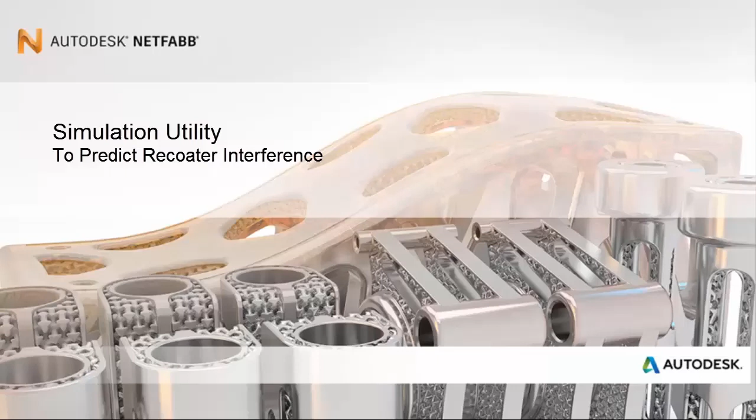Greetings. In this tutorial, we want to explain how Netfabb Simulation determines whether the deformation of part geometry during a build is likely to interfere with the recoater blade. Parts displacing upward through the powder and being struck by the blade is a common cause of part failure during actual builds. After discussing this issue, we will run through an example of a simulation that will trigger a warning

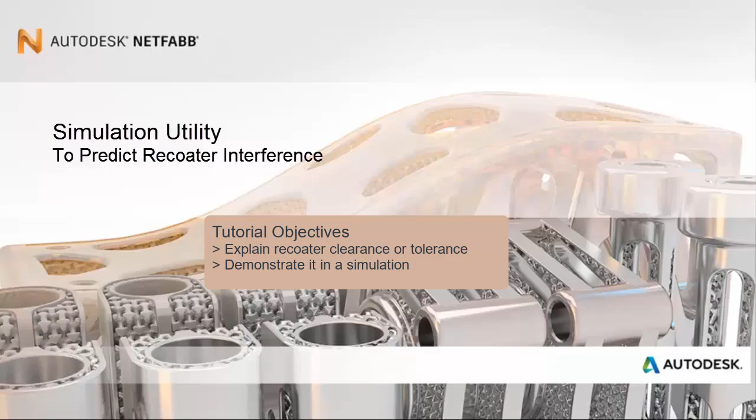of recoater interference. Netfabb Simulation works with a value of recoater clearance or tolerance, which is expressed as a percentage. Let's see how this works. In these diagrams, the gray block represents the solidified material of the part, and the blue area on top is the next powder layer. In the ideal case, with 100% tolerance, none of the previously deposited material has deflected upward into the powder layer. In the second example, an 85% tolerance means that the build has deflected up into 15% of the powder layer. This amount of deflection is normally acceptable.

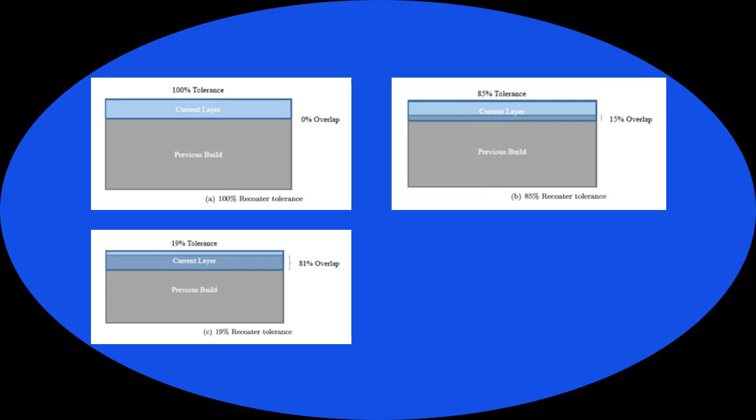The default value for recoater tolerance in Netfabb Simulation is 80%, and if the actual tolerance drops below this level, warnings are reported in the log files indicating that the part is getting too close to striking the recoater blade. That's what we see in this third diagram, where the build has deflected upward into 81% of the powder layer, leaving a tolerance or clearance of only 19%.

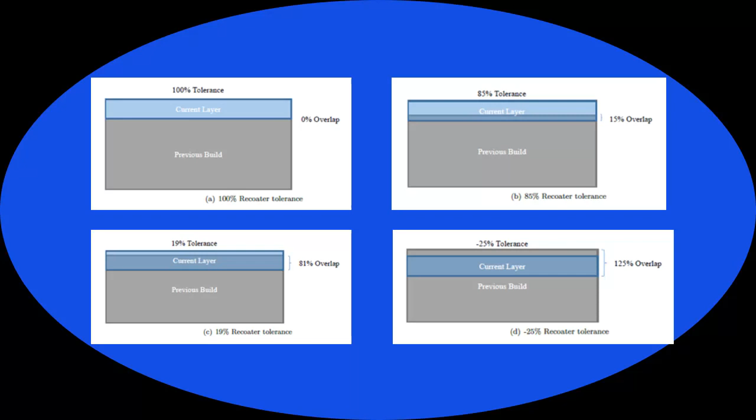Finally, an extreme case is shown in the fourth diagram, where the part has deflected up through the entire powder layer and 25% higher, producing a negative tolerance of minus 25%. The part in this case would definitely be hit by the recoater blade and possibly damage it.

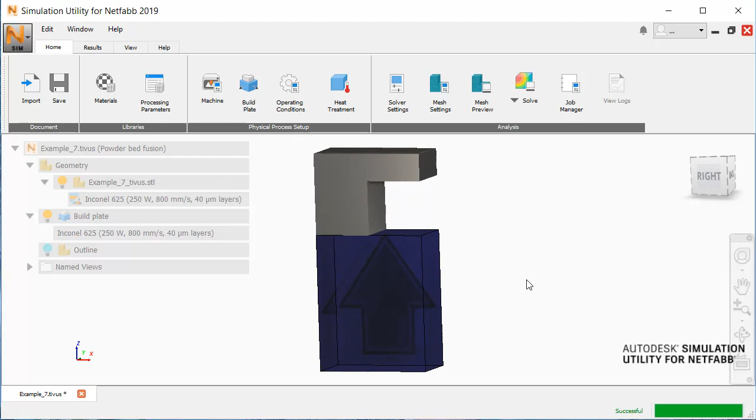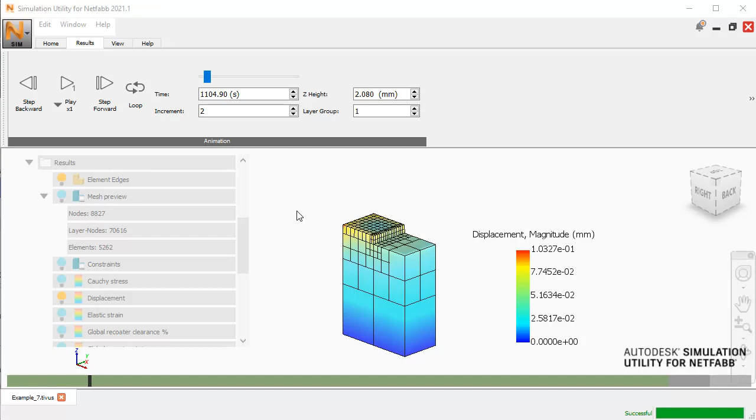To see recoater interference in play, let's go to Netfabb Simulation and open a suitable project file. Note the large overhang here that is very likely to deflect upward as it is built. Without making any changes to settings, we'll just click Solve. After the simulation results are loaded, check that we are seeing the displacement, then play through the progress of the build.

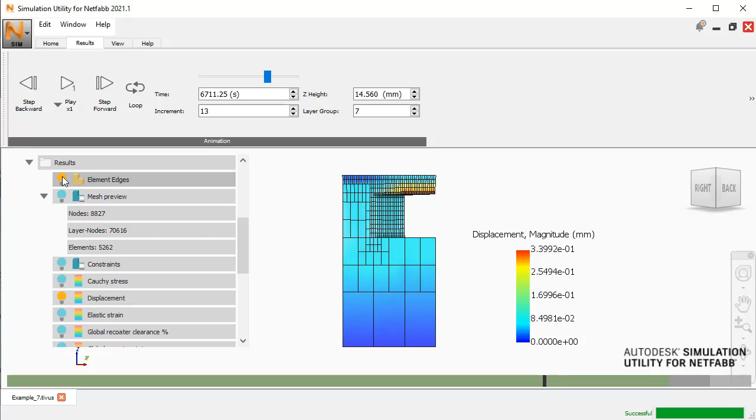As the build gets up above the overhang, we can see that the part is starting to deflect upwards. To better see the colors here, we can turn off the display of element edges. Let's check for warnings in the log files. Scroll to the bottom of the mechanical log, and we see 6 warnings and 1 critical warning listed.

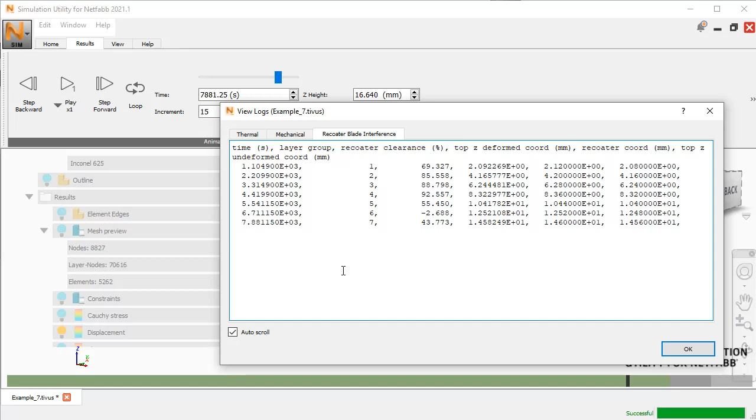If we look at the Recoater Blade Interference tab, we see that in several of the layer groups, the clearance dropped below the default recoater tolerance setting of 80%. The most extreme was in layer group 6, where clearance was minus 2.7%, indicating a part deflection that extends up above the powder layer, so the part would be struck by the recoater blade. Note here that the time was 6711.15 seconds.

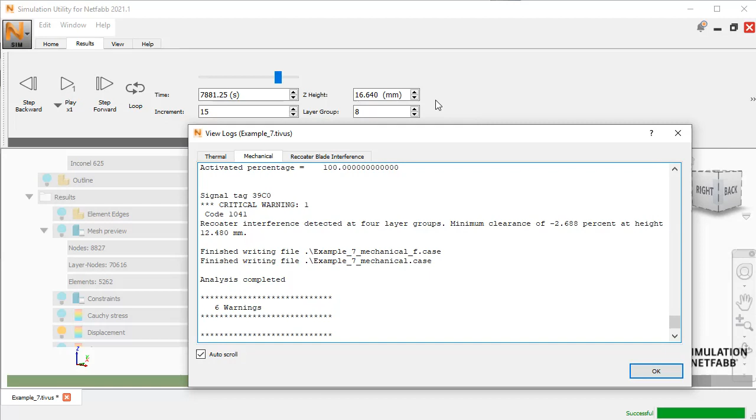Back in the mechanical log, in the critical warning text, we can also see that the minimum clearance occurred at a build height of 12.48 millimeters. Either one of these facts can help us get to the critical part of the build animation. On the animation panel, we can step back to the 12.48 Z height and the 6711.15 seconds mark.

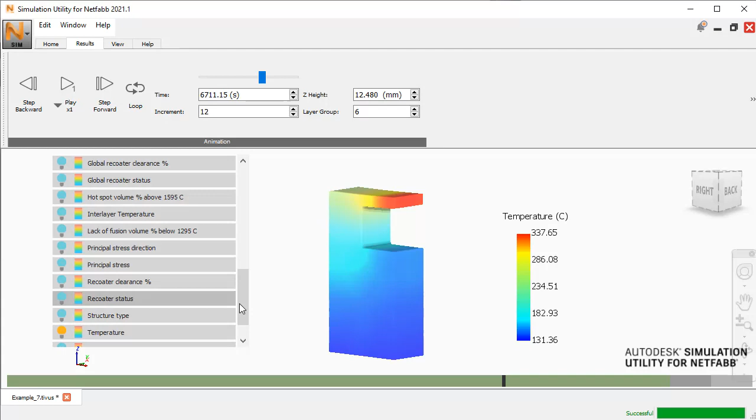We can see that the greatest displacement occurred in the material deposited at the beginning of the overhang. If we switch to the temperature view, we can see that the entire overhang experienced the highest temperature. As a design engineer, you now have the evidence to suggest the need for a design change in this part.

You could, for example, shorten the overhang if that dimension is not critical. Alternatively, you could add support structures to restrain the part from deflecting upward. After changing the design, you could rerun the simulation to see if the recoater interference issue was solved.

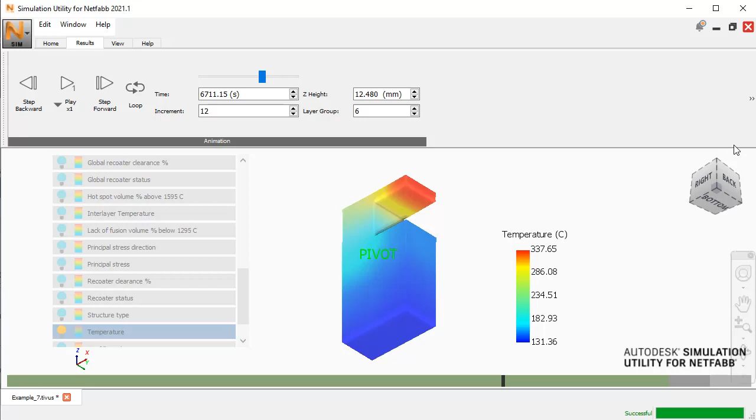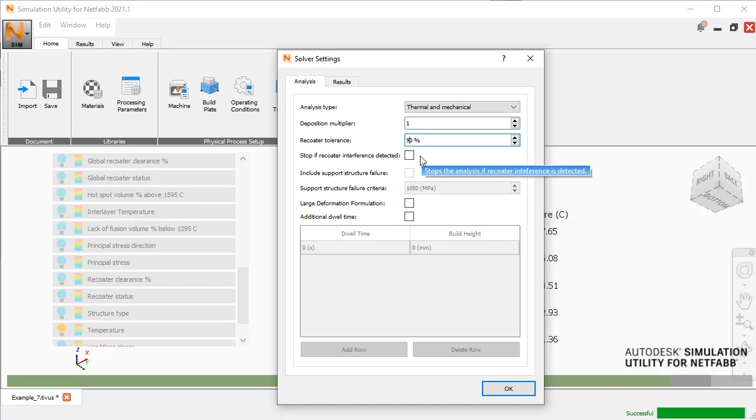If we want to make our simulations more sensitive to recoater blade interference, we can adjust the value for recoater tolerance. Go to the Home tab, click Solver Settings. You can see the default tolerance value of 80% here. And if you want a safer, more conservative value, increase it to, for example, 90%. Also note that you can check an option here to stop the analysis if recoater interference is detected.

So just to review what we've done in this tutorial, we explained the concept of recoater clearance or tolerance and how it's measured. We ran an analysis that produced a recoater interference warning, and we saw how to find that point in the simulation.